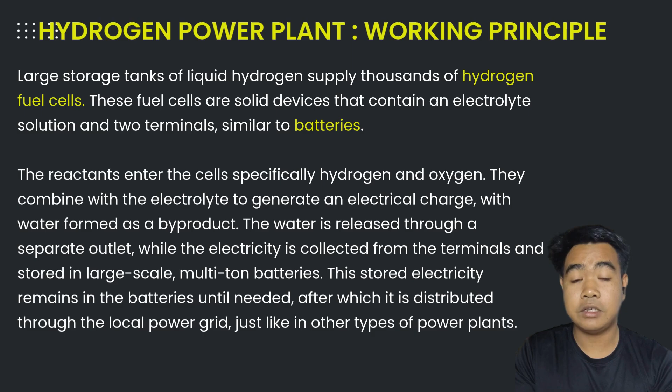So, to summarize the process, hydrogen goes into fuel cells, reacts with oxygen, and produces electricity. The electricity is stored and then distributed to the grid when needed. So, overall, hydrogen power plants offer a cleaner and more sustainable way of generating electricity, making them a promising solution for the future of energy.

A battery is made up of several key components, each with a specific function. First is the anode, which is the negative terminal of the battery. During discharge, it releases electrons. Next is the cathode, which is the positive terminal. This is where the electrons go after traveling through the external circuit. And lastly, the electrolyte. It is another important part, a chemical medium that allows ions to move inside the battery. Without it, a chemical reaction would not happen.

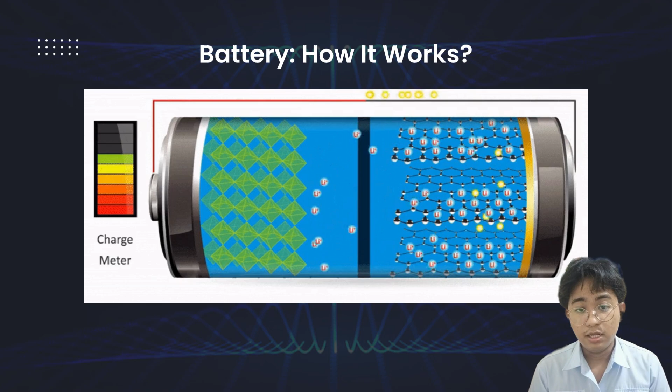In terms of rechargeable batteries, the process can be reversed. When you plug in a charger, an external power source forces the electrons to move in the opposite direction. This reverses the chemical reactions inside the battery, restoring it to its original state. That is why rechargeable batteries can be used many times, unlike disposable batteries, which can only be used once.

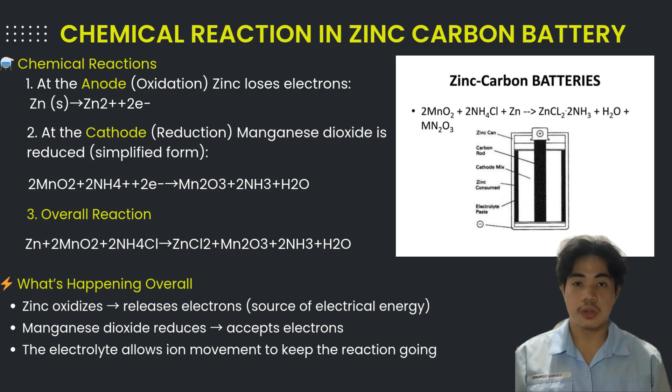Hydrogen fuel cell working principle. A hydrogen fuel cell converts chemical energy directly into electrical energy through electrochemical reactions, similar in concept to a battery, but it keeps working as long as the fuel is supplied. So, yung working principle, a typical hydrogen fuel cell, like a proton exchange membrane fuel cell, has three main parts: the anode or negative electrode, the cathode or the positive electrode, and the electrolyte membrane that allows only protons to pass.

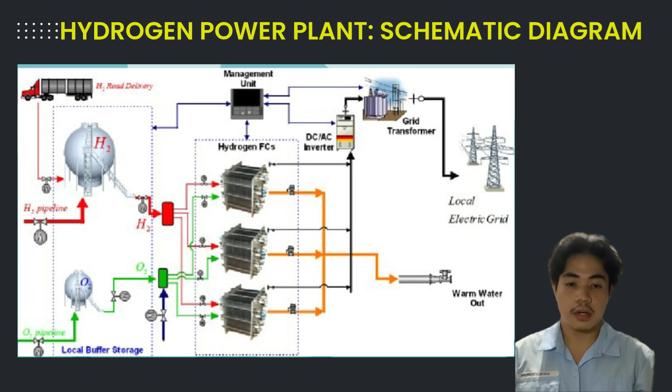So next, hydrogen power plant and why explore it. So now, bakit nga ba natin ito i-explore? Sabi rito, fuel cells have several benefits over conventional combustion-based technologies currently used in many power plants and passenger vehicles.

So unang-una, ang fuel cells ay isang advanced technology na ginagamit para mag-produce ng kuryente. So hydrogen is a very efficient fuel source, capable of producing more energy per pound of fuel than gasoline. So this means that an equal-sized tank of hydrogen fuel will give a vehicle a greater range or more power than one filled with gasoline in an internal combustion engine.

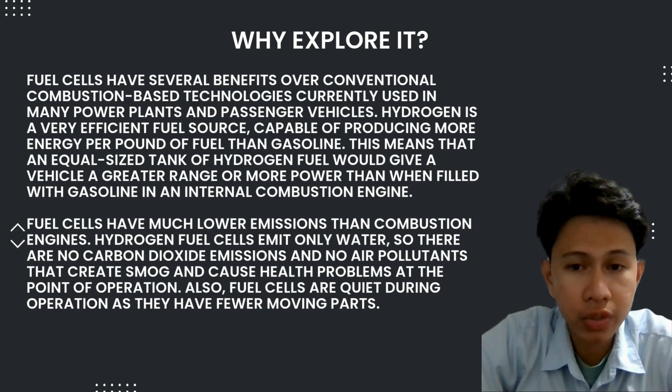So, why hasn't it gone mainstream? Number one is hydrogen production through methane, steam methane reforming, SMR. This is currently the most common method because it's cheaper than other methods. It involves reacting methane with steam to produce hydrogen and carbon dioxide.

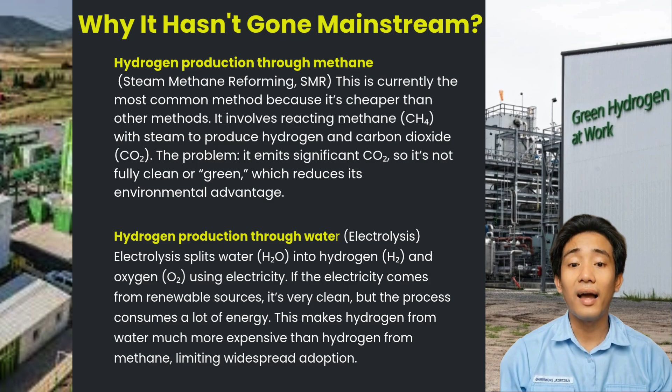Next is the cost. Hydrogen production, storage, and transport are costly compared to fossil fuel. Building hydrogen plants and pipelines, compressing and liquefying hydrogen for transport adds millions in investment. These high costs make hydrogen power less competitive in the electricity market.

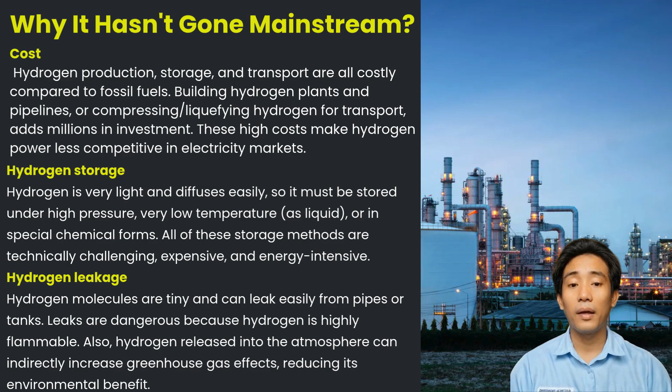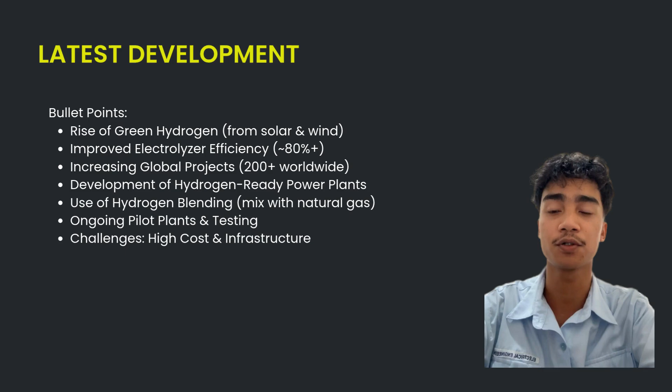There are also pilot hydrogen plants currently being tested, but most are still in the early stages. However, challenges remain, such as high production costs and limited infrastructure. In conclusion, hydrogen power plants are continuously improving and have strong potential to become a major source of clean energy in the future.